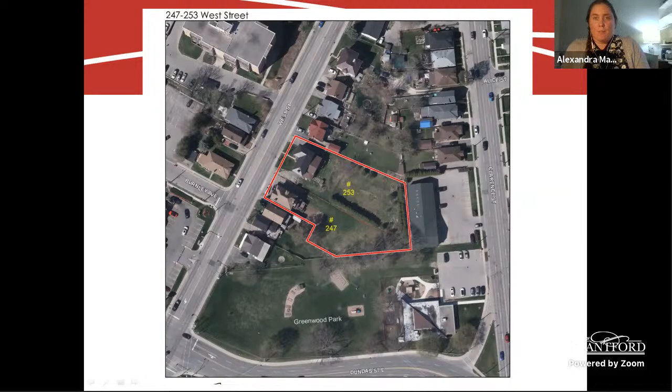The property is currently zoned residential conversion zone. The apartment building as proposed is not a permitted use, hence the requirement for the zoning bylaw amendment application. So now I'll pass things over to Marc, who will present the presentation and proposal for the applicant.

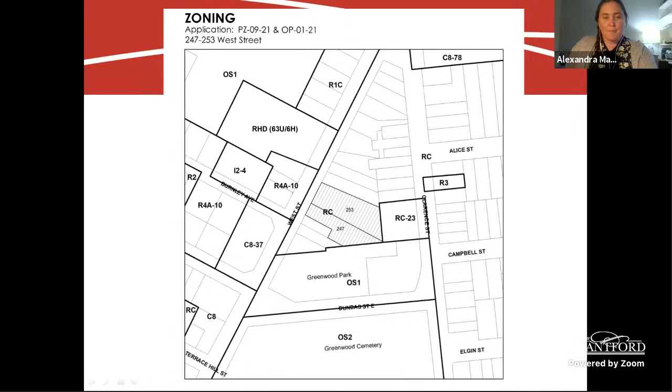Thank you very much, Alexandra. I believe, if Cameron, if you're on, if you want to do a quick introduction for yourself. Yeah, that'd be great. Thank you.

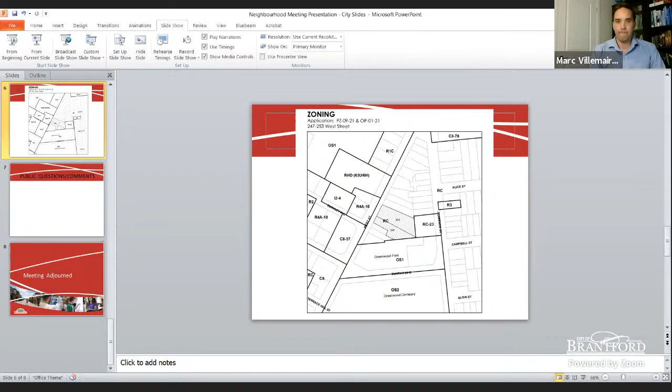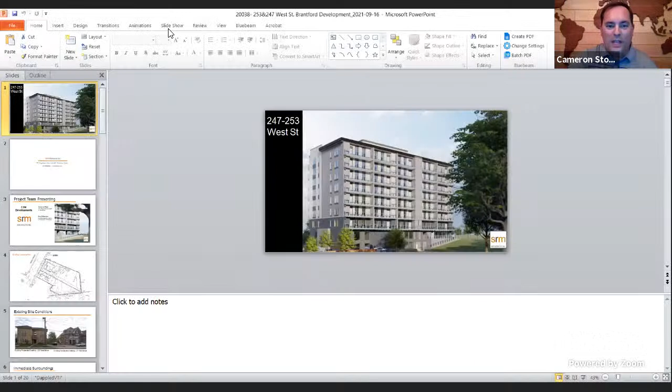Hi everyone, I'm Cameron Stone from CSM Developments. Steve Asel and Mark Binakers are my partners, they're watching the meeting and taking in all of your questions and feedback tonight. We're from the community, we all live in Brantford and Brant. This is our home, just like yours. We've owned several properties in the city of Brantford over the last 12 years. We want to continue to build this community. We believe in this community, and we feel there is a need for purpose-built apartments in the city of Brantford.

We've hired a tremendous team of architects, engineers, and consultants to work on this project. They're the experts, and any questions they will answer either today or in writing following the meeting. I want everyone present, and watching on YouTube right now, to know that after the consultants, engineers, and architects have moved on to other projects, we'll still be here. We plan to build a building we are proud of, where people want to live and call their home. I'm going to defer to one of our consultants, Marc, who's on camera right now from SRM. He will be handling our presentation. Thank you everyone, and I appreciate the opportunity.

Thank you very much, Cameron. Good evening, thank you for attending our virtual public meeting. We're here to present the proposed development for Cameron, Steve, and Mark at CSM. My name is Marc Villemaire, I'm a managing partner at SRM Architects. Next slide, please.

So just a little plug here. The project team presented: CSM Developments, you just saw Cameron with Mark and Steve. They're a wonderful team of young guys who are really passionate about development, and they're not looking to design and build condominiums that they just build, sell, and keep flipping. They're really interested in committing to a sustainable design here that will last a long time. When they came to our team at SRM, they effectively said they want to build attainable rental apartments for people in the community to live in. And they found this lovely piece of land that fit within the official plan for intensification on a transportation corridor.

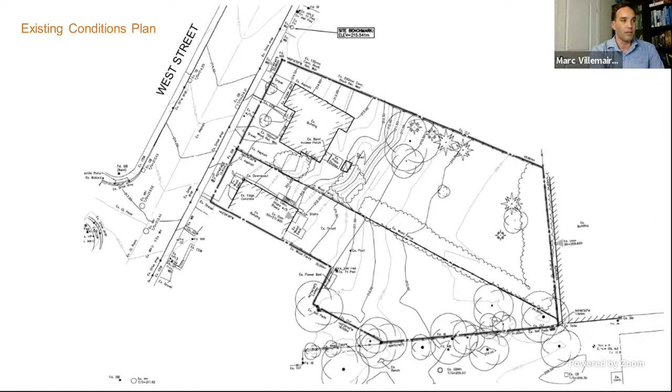Next slide, please. So this is just an existing conditions map. You've already seen it, so I won't dwell on it too much. There's 2 existing buildings on this property, and fundamentally, to facilitate the development of this site, these 2 homes would be demolished.

So we're going to be using this grade differential to assist with an efficient parking layout. And I say efficient purposefully because we are trying to design this building as cost effectively as possible, so that we can have a wonderful development that's affordable to the public to rent - not $1 million units. These are very comfortable units that we feel will meet the market demands in the community.

Next slide, please. So to the immediate north, the site's existing 1.5-story residential home with a garage rests close to a shared property line. Continuing down West Street, west are a number of other residential single family homes, 1 to 2 stories.

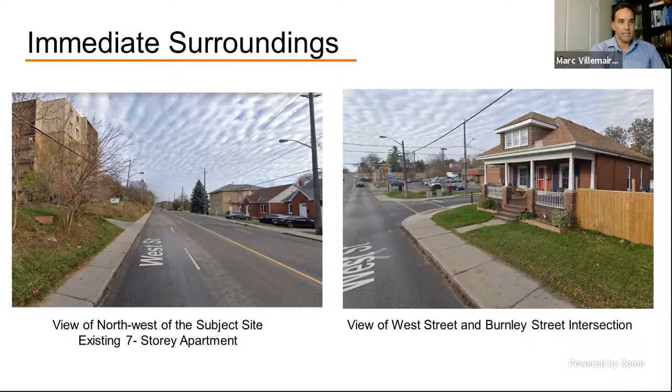Next slide. So our proposed building - CSM came and asked what's permitted, what can we build here, and what's effective. We've come up with an 8-story multi-unit residential building. The proposed development consists of 70 rental units and 68 parking spaces.

The parking spaces consist of surface parking as well as underground parking, accessed using what you could call a ramp, but it's effectively just following the gradual slope that gets you to the rear of the site. We also have under-building parking proposed, which would effectively be at level 1, partially accessed from the streets. Currently total 68 parking spaces, 8 of those being visitor parking spaces.

I saw one question with a little bit of confusion over the total number of parking spaces. We identified 3 parking spaces being accessible parking - that's not in addition to the 68, so it's 68 total parking. There's vehicle access to the development from West Street, a large outdoor amenity area, and some internal amenity spaces also proposed, including workout rooms, gyms, that sort of thing.

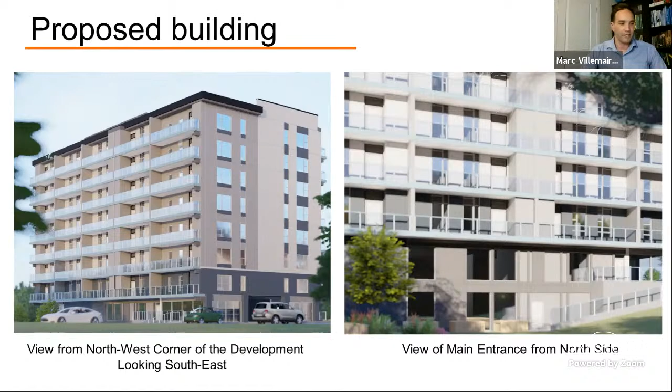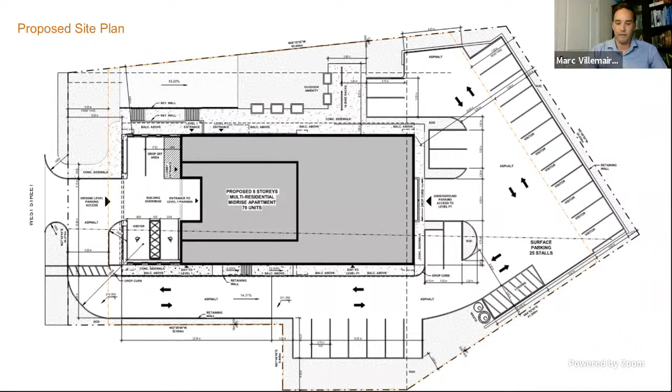Next slide. Thank you. So this very accurately shows how you'd enter from West Street, currently proposed. You can access surface level parking if you go directly into the development. And then we have a driveway sloping down to get to the rear of the development, which gives you your underground parking. This underground is technically a basement, and it will be mostly underground except exposed at the rear of the site. But the building truly has a fully subterranean level, used for storage and amenity - just the typical building service spaces you would need in the development.

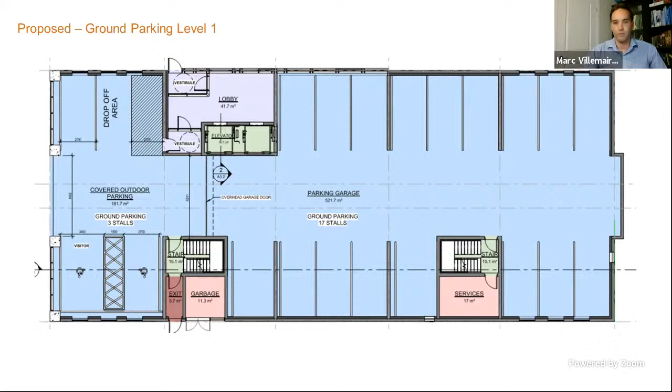Next slide. Thank you. So this here is your surface - this is level 1. You enter directly off the street. There's parking in the building, there's also a common lobby, an amenity area, some vestibules. You have access to stairs, and of course the elevator to get up to the first residential level, which would be on level 2.

Next slide. This level looks very similar, and that's because that's the actual underground parking that follows the same structural system. This would be accessed from the rear of the site when you drive around the building, and now you are effectively in the basement.

Because the site does slope, we have opportunities for doors at grade and some windows at certain points, and we're working with our civil engineers to work out the grading to maximize the efficiency of the site and maintain a very cost-effective building that we can then use additional resources to beautify the development.

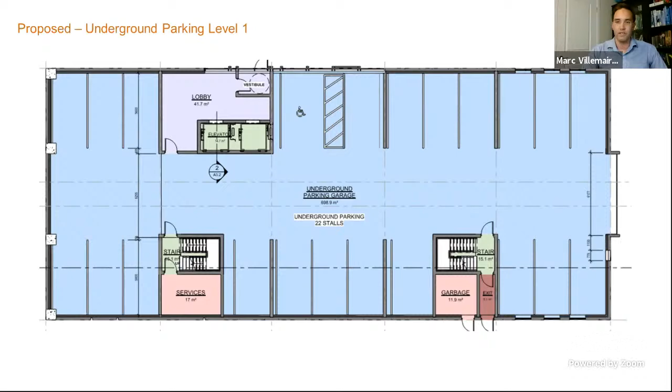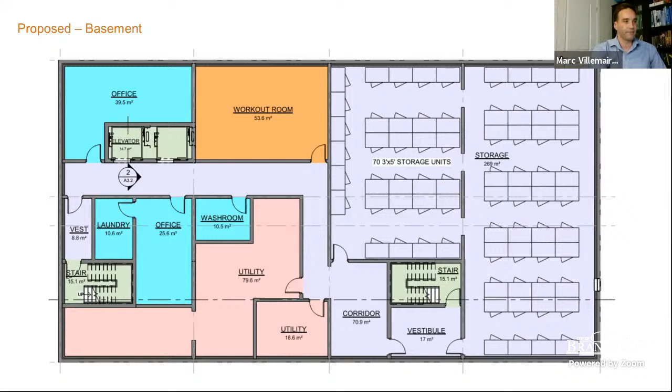Next slide, please. This is the basement I was just referring to. So some amenity, office, and back-of-house spaces, as well as some storage opportunity in the truly below-grade level.

So this is a typical residential level, so this could be level 2 through 8. You can see here just general nice common living spaces in the suites, and you have any number between 3 and 1 bedroom units. Every bedroom is on an outside wall.

I do have a range of units that was not specified, so I did a little bit of confirming here. We're anywhere between 515 and 890 square feet. Of course, an 890 square foot suite would be on the corners where we have more natural light, so that we can ensure every bedroom is on an exterior wall plus a common living space.

By virtue of the structural system we're exploring for this building, we have a unique opportunity to have full balconies on every single unit for the entire width of the suites. This provides additional outdoor amenity space considered private for each suite. Then, of course, at grade, you have the more common outdoor amenity spaces.

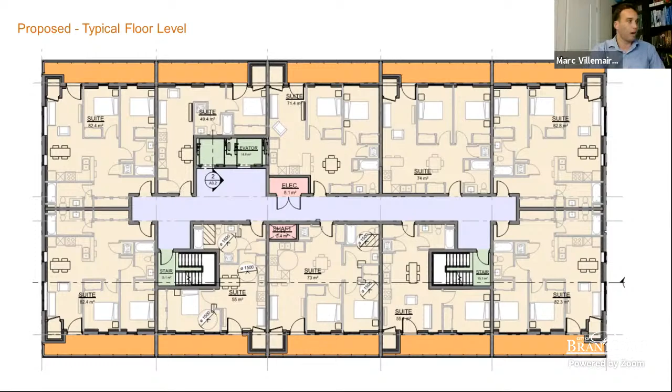Next slide, please. So this is just more of a context map showing the relationship between the proposed developments, the unique property lines and boundaries that we're working with.

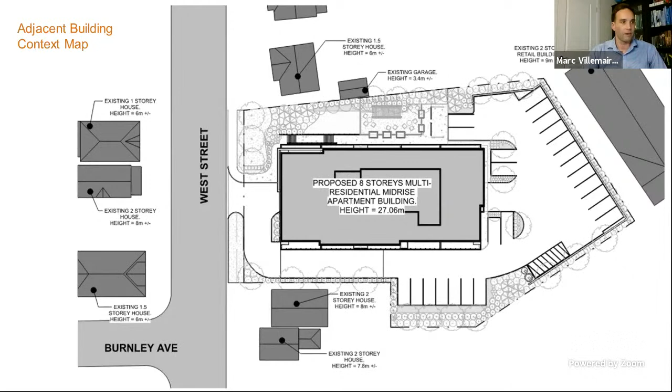And so we're operating as a rectangular building. I'm not sure what the shape is of the site, but we've been able to maximize the outdoor space for landscaping and outdoor amenity. While we're trying to keep the building with a presence towards West Street, it looks like there's going to be a road widening, so we'll be working out how to address that as part of our future resubmissions.

Next slide, please. So from an urban design perspective, the development is pretty straightforward—it's a basic rectangle as a built form. We're trying to keep everything as simple and practical as possible so we can have a high degree of comfort on the actual function of the suites. Having a building that's effectively a rectangle, we're tasked with the wonderful opportunity to create, with materials on this building, a sense of intrigue and fenestration.

As you can see here, the access to the site—we have one point of vehicle access. We are on a transit stop, and that further helps reinforce the parking strategy on this development, where we are not looking to provide 2 parking spaces or 2.5 parking spaces per suite. Next slide, please.

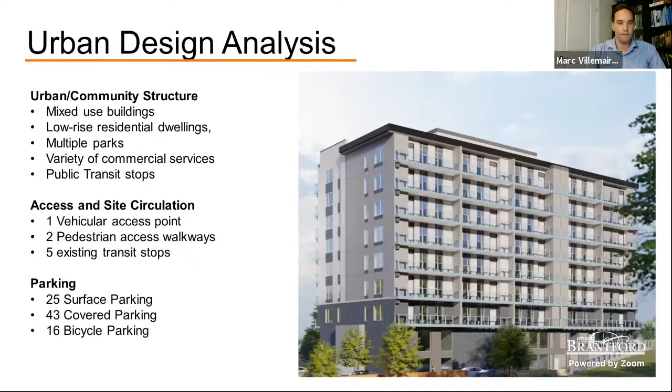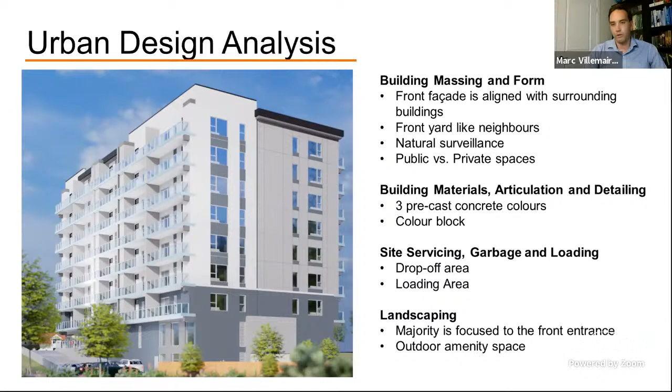Next slide, please. So as part of the submission, it's just a simplified version, but actual detailed building elevations help articulate and explain which portions of the building will be glazing and vision, and which portions will be solid wall. Wherever we have solid wall on the lower levels, we're looking to do very nice glazing treatments so it looks like a window wall or curtain wall, so we can effectively activate frontages with internal programming.

But beyond that, when you get up to the levels where you have just a solid wall acting as a structural member for the building, it's not just going to be a painted concrete wall. Because we're looking to do precast, it gives us the opportunity to put in special patterns, whether masonry patterns or swirl patterns, along with some very nice glazing. This gives us a lot of latitude in how we can decorate the building moving up, so we can break up a big built form and create several nice forms for a balanced composition.

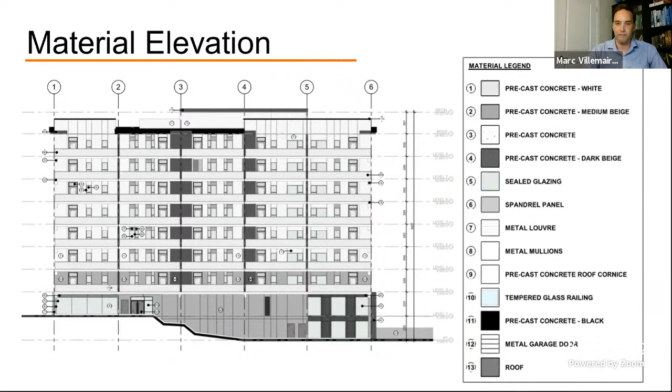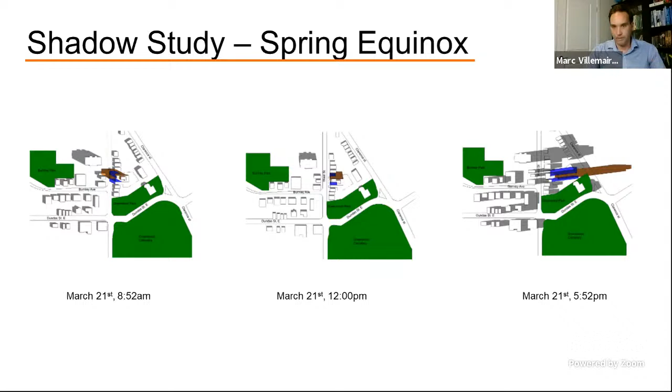Because the development is relatively narrow in terms of the geometry, we found that the shadows pass through neighbors' properties rather quickly. So when we do cast a shadow, there absolutely would be shadows cast on neighboring immediate developments, houses, and backyards. However, the shadow wouldn't reside there very long, it would move through fairly quickly, and the diagrams we presented help illustrate that fact.

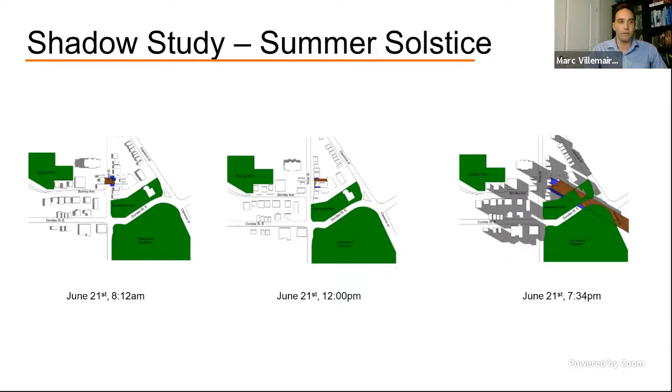And then, of course, the last slide here is the winter solstice. As you can see, the shadows are fairly long depending on the day. And of course, we're using the City of Brantford terms of reference as set times, so that when you compare a development against another development, everybody's using the same shadow and impact standard.

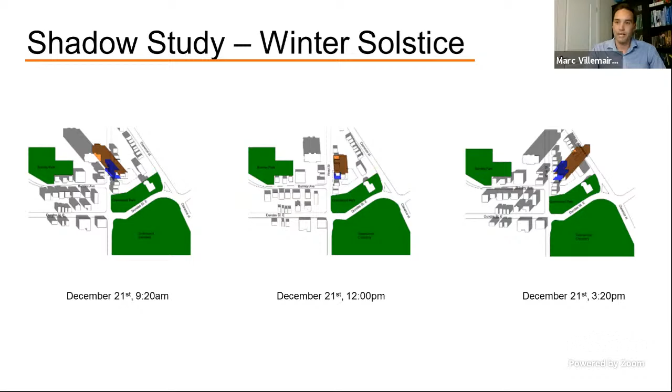So I certainly don't want to bore people by going into the actual methodology of everything, but what we feel is helpful with these diagrams is people can visually see the impact of the shadows cast. We're not shying away from the fact that the development does cast shadows, and based on our analysis, where the shadows move, it will cast a shadow in a certain sphere or radius of residence, but then it moves out of there beyond a certain point.

Thank you very much. That concludes my presentation for what we're trying to build here and what we're proposing. But we're very happy to take questions, and I will do my best to answer everything right now, and for things I'm not comfortable answering because I don't have the technical background, I assure you that we do have a team of engineers and planners that can provide additional feedback.